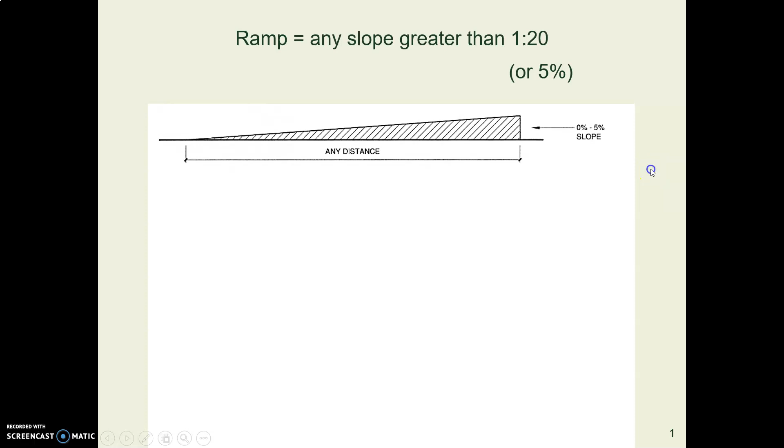Next time we're going to talk about the ADA and accessibility. ADA is part of many building codes. But for now, let's just look at what the code says about slope. And if you have a ramp, it cannot be any steeper than 1 in 12, although that's awfully steep.

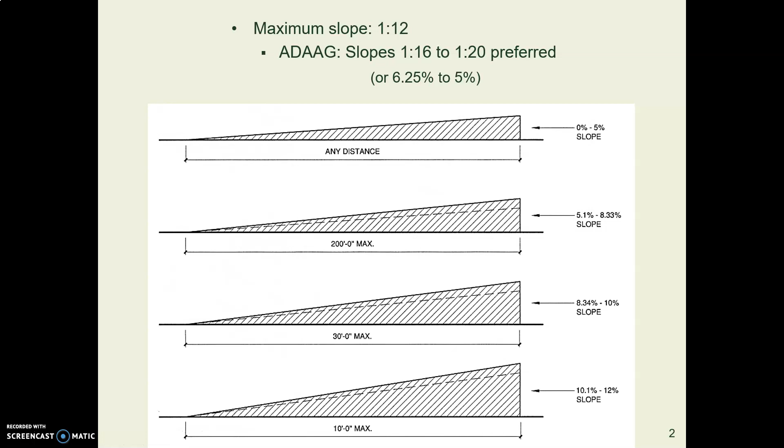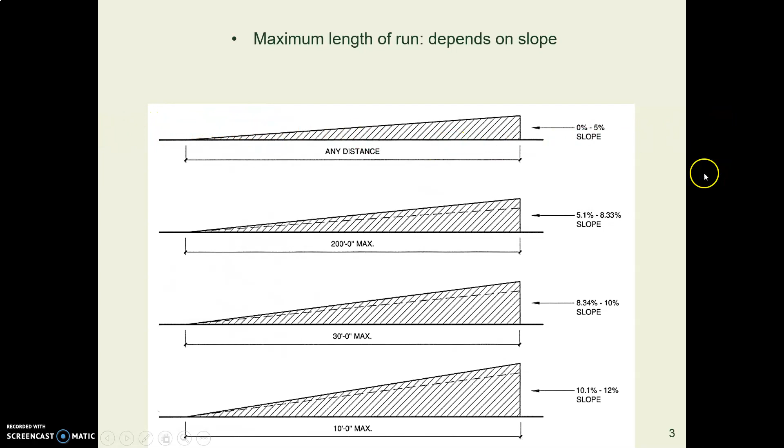The length of the run depends on the slope. So looking at the bottom ramp here, if you have a 12% slope, you're only allowed to do that for 10 feet of run because, as we mentioned, that's hard work and you can't force someone in a wheelchair to keep doing that for a long distance. However, if you have a 5% slope, you can accommodate that in a wheelchair, and so a 5% slope is allowed to be any distance, and then in between are intermediate requirements.

Now, there are some exceptions. Sometimes you have a place where you just need to make a little short adjustment, usually with some retrofitting of some existing structure. If you're rising no more than 3 inches, you're allowed to have a slope of 1 in 8. Well, if you think about that, a 3-inch rise with 8 times the run means the run is 24 inches.

So you could have a little short rampy thing that was 3 inches high and 24 inches long. A person in a chair could get up over that with a little effort. But no matter what your problem is, you're not allowed to have a slope steeper than 1 in 8.

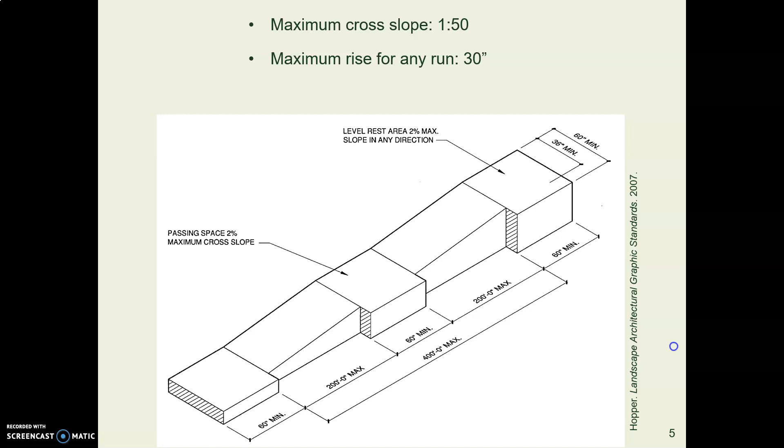The cross slope means the side-to-side slope, and it can't be any steeper than 1 in 50. And no matter what the slope is, and no matter what the run is, you can't rise any more than 30 inches in height in any one section of ramp without putting a landing in there. Side to side, the ramp has to be at least 36 inches in between the railings, and that's to accommodate wheelchairs.

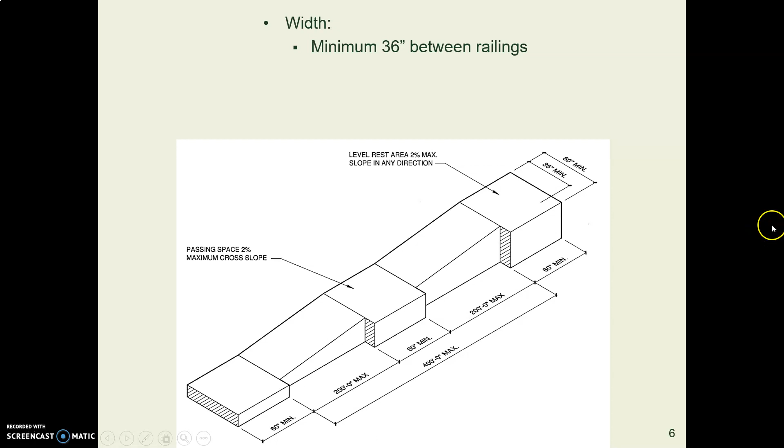You have to have landings, that is, a flat place where someone can rest. You have to have landings at the top and at the bottom of every ramp. The landing has to be at least 60 inches wide and 60 inches deep. And if you think about what you know about wheelchairs, that's to accommodate someone making a turn in a wheelchair.

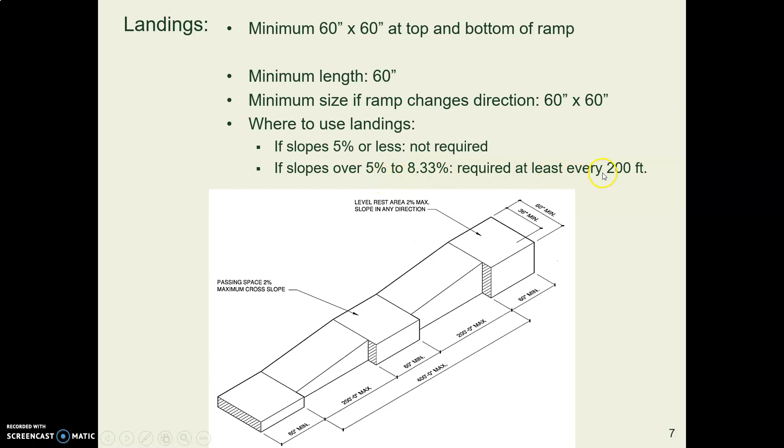If the ramp changes direction, you have to have at least a 60 by 60 landing. And depending on the slope, if the slope is over 5%, you need a landing every 200 feet of run.

Now, handrails. And think about who's using these ramps. It's not just spunky young athletes, it's also people using wheelchairs and walkers and recovering from illness and so forth. So we need handrails. And the code says if you've got one of those short ramps that's allowed to be 1 in 8, you have to have handrails on both sides, period.

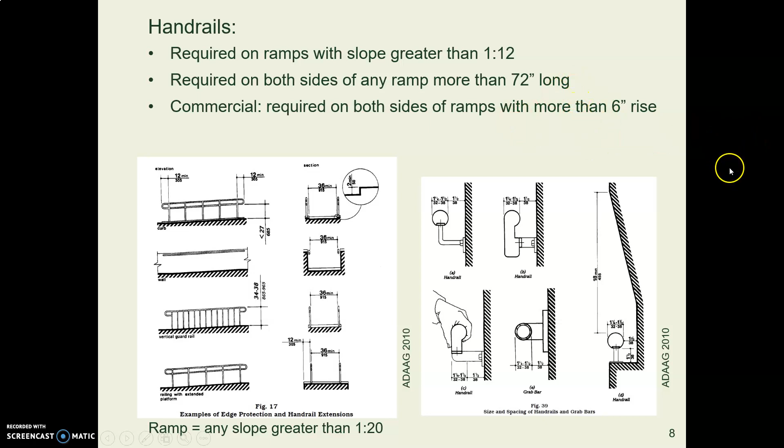If you have a ramp with a run more than 72 inches or 6 feet long, you have to have handrails on both sides. And in a commercial setting, if your ramp has more than 6 inches of rise, you have to have handrails on both sides. Handrails on ramps and stairs have to be between 34 inches and 38 inches high. And we've talked about the difference between residential and commercial.

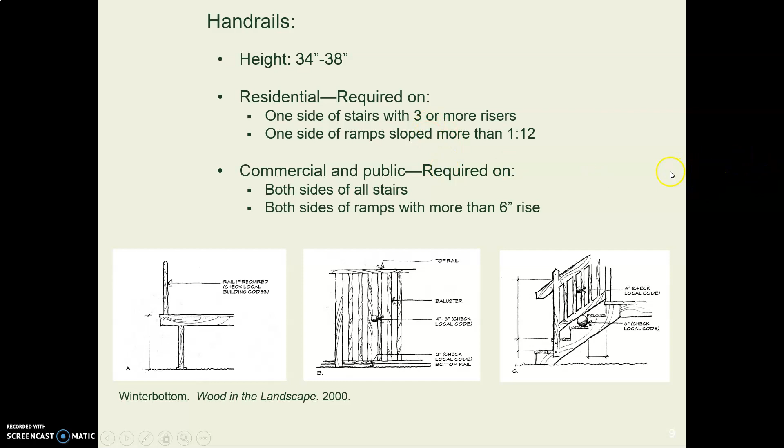If you're putting a ramp on a house, remember that, let me see, can we look at our picture of slopes? There's a slope. So if you're going up a certain height, you need a long distance to be able to make that slope flat enough.

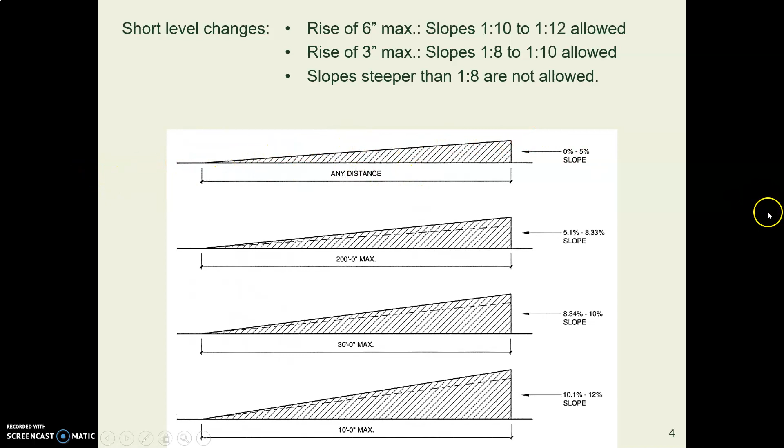So looking at our porch here, when you have a front door or a door and you're trying to put a ramp on it, ramps work better when the height is 30 inches or less because you need a lot of space to accommodate that horizontal run.

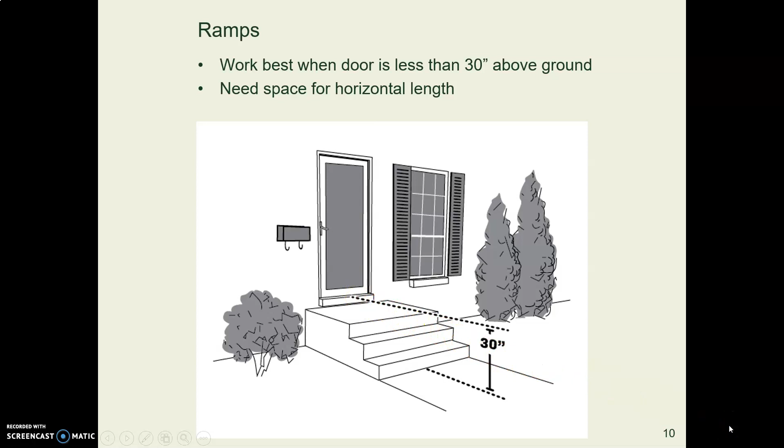And think about who's using these ramps and what it's like to roll or walk up something sloping. We need to use a finish that's got friction on it, a slip-resistant finish. And for preserving our house, we need to slope it a little bit so that water drains away from the foundation, at least a 2% slope.

And next time, we're going to talk about accessibility and the requirements of ADA, and I'll show you a flyer that talks about installing a ramp.